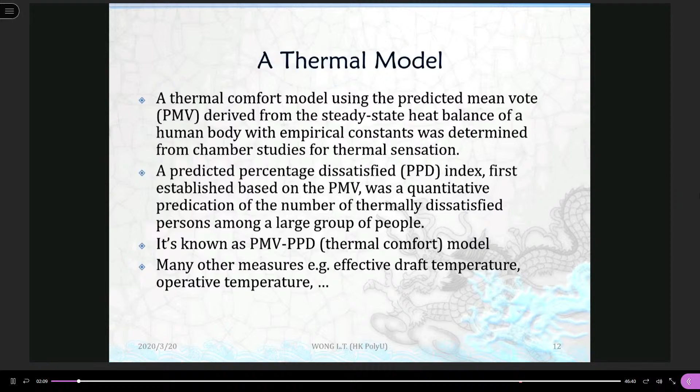Operative temperature, effective draft temperature, a lot. But in this lecture, I only show you the details of this model. The model developed by Professor Fanger looks very complicated, a very long equation, talking about the PMV, the predicted mean vote. The voting for thermal comfort with the result 0 is neutral. So if the calculation is equal to 0, it means a neutral feeling, thermal comfort.

On the minus scale, PMV less than 0 means on the cold side. Higher than 0, on the positive side, means on the hot side. So based on the calculated number, based on the 6 parameters, we can predict overall for a group of people the average, which number will be the final vote. This is the so-called thermal comfort equation.

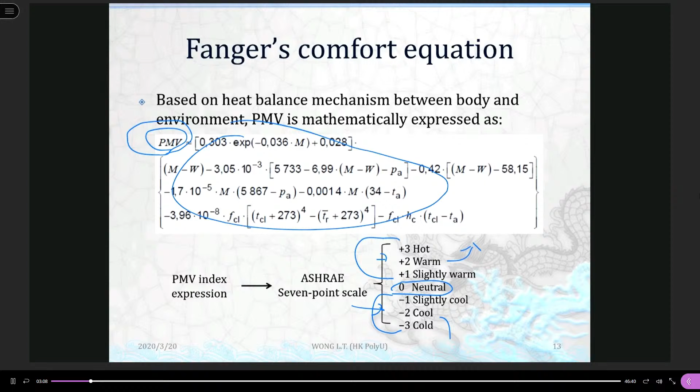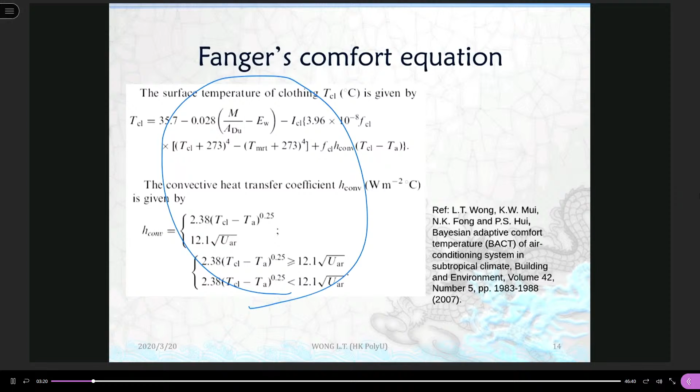The equation here already looks complicated, 4 lines, and each of these parameters is also associated with another few lines of calculation. Therefore, when we apply this equation for hand calculation, it feels complicated. Therefore, we have quite a number of written programs to calculate for us interactively. You can find a lot of programs for that through the internet.

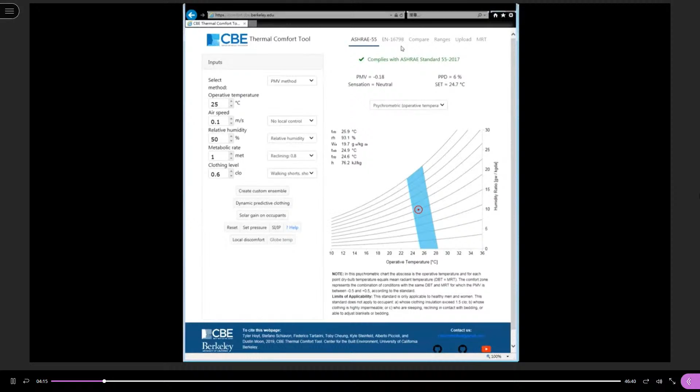I show you here one example available from a research center, UC Berkeley, the so-called CBE Thermal Comfort Tool, which works in an interactive manner as a calculator. You may play around after the lecture; it provides you an interactive tool. You can change the temperature. Move directly. I'll show you again. You can change the temperature.

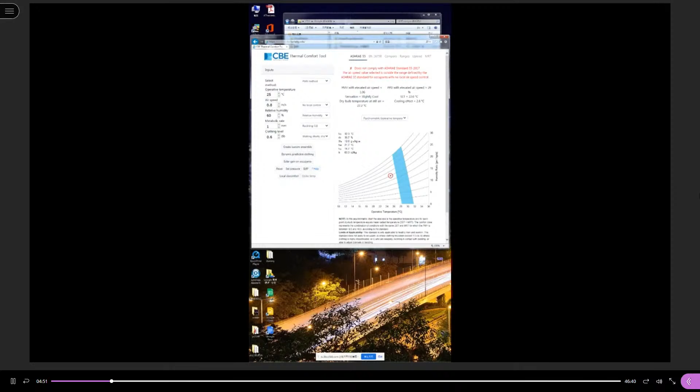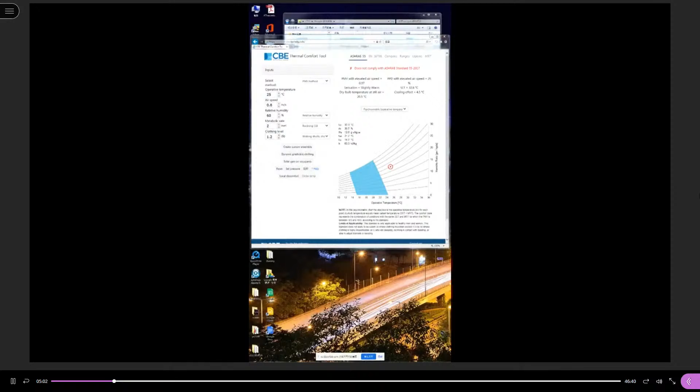Say 25 degrees Celsius, within the thermal comfort zone. The higher the velocity, the thermal comfort zone moves. And different relative humidity, showing this particular point. The condition, different metabolic rates, different clothing values. It's an interactive tool, and we have a lot of this kind of tool available.

The mean votes. The thermal comfort model gives a number, the so-called mean vote, and the mean votes are divided into a 7-point scale. These 7 points are a so-called differential scale, where people can choose the one most representative of his or her thermal sensation at that moment. For the mean votes, the experiments were conducted with people submerged into an environment and asked to respond using

the differential scale and also the dichotomic scale to express directly satisfaction or dissatisfaction. Just two choices, you have to choose one. Together, they can develop the percentage of people corresponding to each vote number and the percentage of the group who feel satisfied. The thermal sensation votes were aggregated to obtain the mean vote for each set of conditions, and the mean vote indicates approximately the average comfort sensation of occupants in terms of percentage.

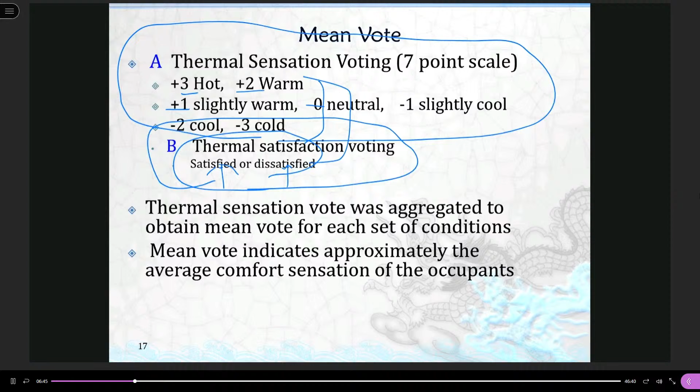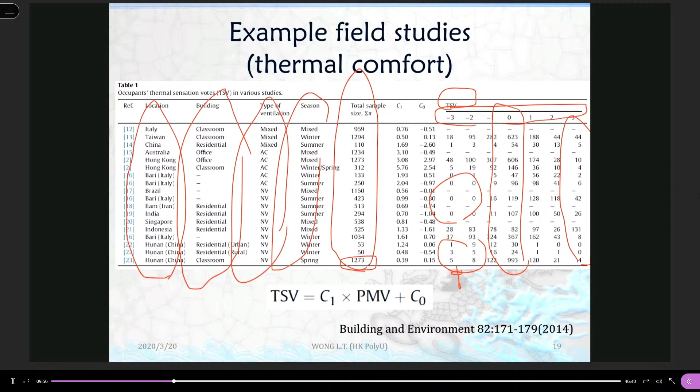All right. The slide shown here is just to draw attention that the thermal comfort model developed in the chamber study may not fully describe the field situation. There will be some fine adjustment. But anyway, at the level 2 study, what we expect from the thermal comfort study is that thermal comfort is a feeling expressed by the human body, a state of mind. And this state of mind can be described by 6 parameters as proposed by Professor Fanger: 4 physical parameters, 2 related to the human body. And these 6 parameters are measurable.

From these 6 parameters, we can calculate the predicted mean vote for the thermal comfort of a group of people. And with this mean vote, we can predict what portion of this group of people may feel dissatisfaction. All right, for the thermal comfort model, not too difficult.

Okay, next, let's see your collective view. Let me build up a multiple choice for you. Let's see how the response was, how well you understand thermal comfort in this lecture. Okay, not too bad, because this is just a theoretical description in the lecture materials. After the tutorial questions, it will be much better. Thank you very much.

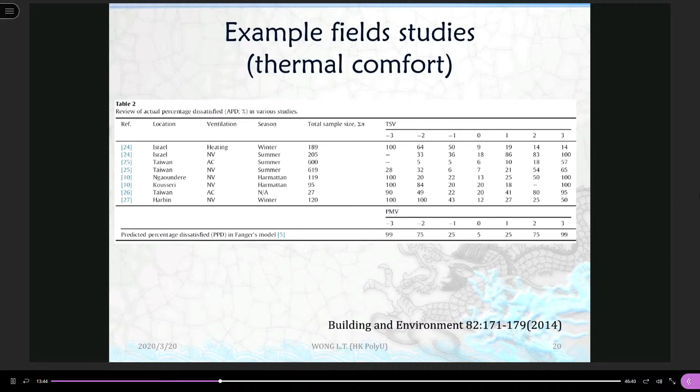Next topic, indoor air quality. Indoor air quality is a term to indicate the air quality within indoor spaces. Especially, we are concerned with the health and comfort of building occupants. However, the term is not clearly defined because we have 2 issues: one is health and the other is comfort. So that is sometimes quite confusing, also to me. Which indoor air quality are we talking about?

Some people are concerned about health, long-term health effects, short-term health effects. Some may talk about the comfortable feeling: the smell is not good, the smell is heavy, something like that. So indoor air quality is actually a vague term that people use daily. The broad disciplines of indoor air quality cover gases and compounds in the air, particles, microbes, contaminants, a lot of different mixtures inside the air. So indoor air quality is actually a very huge topic. We would need at least a few subjects to describe it fully.

In this lecture, we just show you some very simple, basic backgrounds of indoor air quality and control. I think we start from the guidelines for the indoor air quality certification scheme, and this is a baseline control in the legislative manner. This legislation started, I think, 30 years ago already.

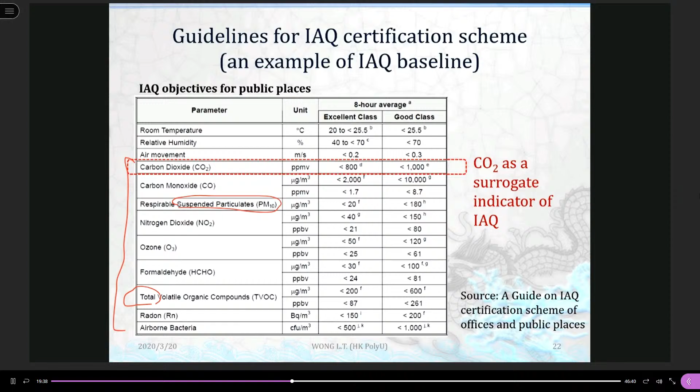Radon, a radioactive gas emitted most likely by granite, which you'll find very high in basements. Airborne bacteria. Also newly introduced, the fungi. Amongst those, we need to put a lot of effort to understand and describe them. Therefore, at the entrance level of study, this level 2 in architecture, buildings and built environment, we will select one of the parameters as a surrogate indicator.

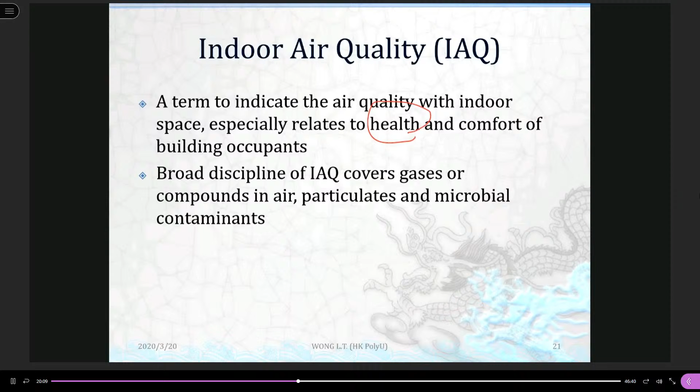For studying indoor air quality, we mentioned that we could assess it by means of health effect or comfort. Here we stick to an approach of a surrogate indicator. Surrogate indicator means CO2 actually will not create a particular physically related health effect or comfort feeling. Actually people are quite insensitive to CO2 levels. However, CO2 levels in the normal indoor environment are a good indicator, because high or low CO2 is representative of some situation.

Say high CO2 means a lot of people emitting smell, doing a lot of activities, associated with, say, high dust level and much VOC emission. So CO2, although not a direct parameter causing health effects or affecting human comfort, is a good indicator that some other related parameter may cause concern for thermal comfort, human comfort and health. So CO2 as a surrogate indicator is proposed here.

Okay, description. Various studies demonstrated that the measurement and analysis of the indoor CO2 concentration could be useful for understanding the acceptability of the indoor air quality in air conditioned and mechanically ventilated spaces. As I mentioned, there are some relationships studied between the indoor CO2 concentration and the indoor air quality. Here I list some examples, say the health effects of elevated CO2 concentration.

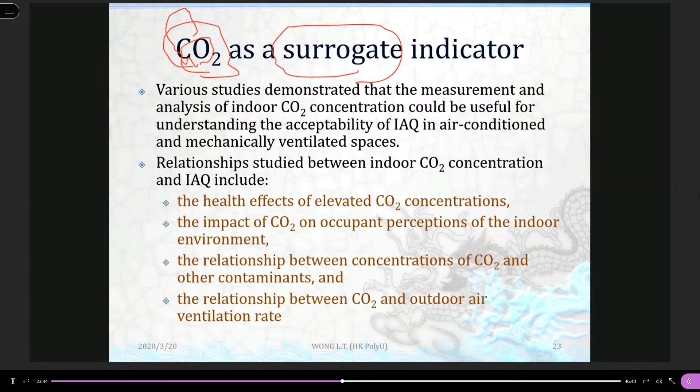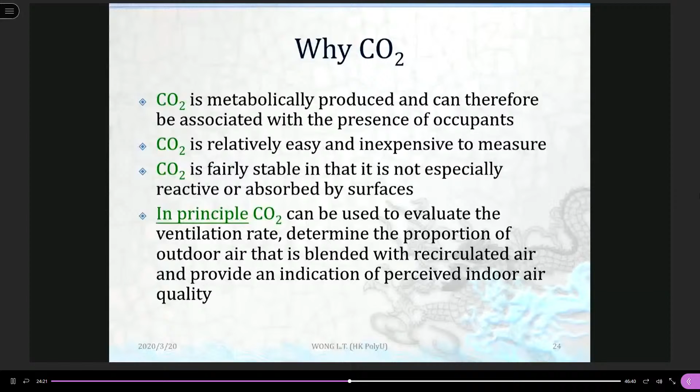The next question is that we do have a lot of parameters. Why is CO2 selected? Because CO2 is metabolically produced by the human body, and it is easy to measure, relatively easy, relatively less expensive. And in the air, CO2 is quite stable and will not react with other substances and surfaces. Therefore, in principle, CO2 can be used to evaluate the ventilation rate closely, to determine the proportion of outdoor air used in order to determine the recirculation air for the air conditioning system.

One of the common indoor IAQ control strategies is dilution. Basically, to control the indoor pollutants we have three different methods. One is dilution. Dilution means we add in clean air so that the pollutant level can be reduced. This is the so-called dilution effect. The common control is by means of dilution, so our calculation will stick to that.

Apart from dilution, we have two other methods. One is emission control. Say we use materials with less emission of formaldehyde, for example, so some materials get a certificate showing the material is safe, emitting less than a certain amount of the pollutants. That's emission control. The other one is removal. We try to remove the pollutants directly from the air, for example, we install a filtration process to reduce the level of particulates. So we stick to the dilution effects in this lecture.

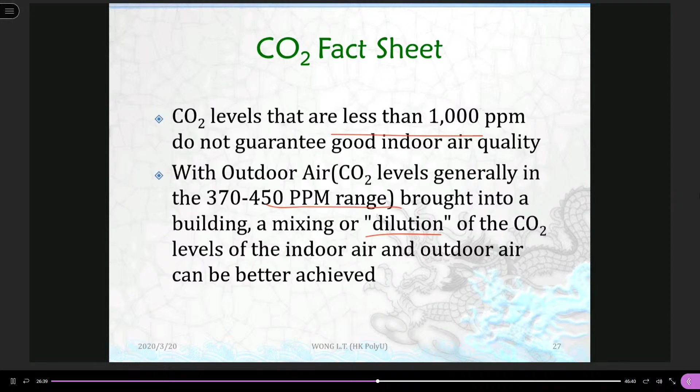And for the CO2 facts, we have mentioned them already. We can apply it closely related to dilution effects. CO2 concentration does not provide a comprehensive indicator, but it's less expensive, so we use it quite frequently as the first level of screening. It also can be indicative of the acceptability of a space by means of body odor. This body odor is calculated from a number of people subject to a certain condition.

In a European country, they developed it for a standard person, with standard height and weight, and bathing level, how many times per day. They put the people inside rooms and then asked people to respond about the body odor. This is the study related to CO2. Under some circumstances, CO2 can also be used to estimate the building air change rate and fresh air at the AHU. I will show you the calculation in the tutorial question.

And there is one study conducted by OSHA. People subject to 8 hours exposure per day to an elevated CO2 level of 5,000 ppm is legally permissible, because they found no significant health effects at 5,000 ppm, so we know the tolerable limit is quite high.

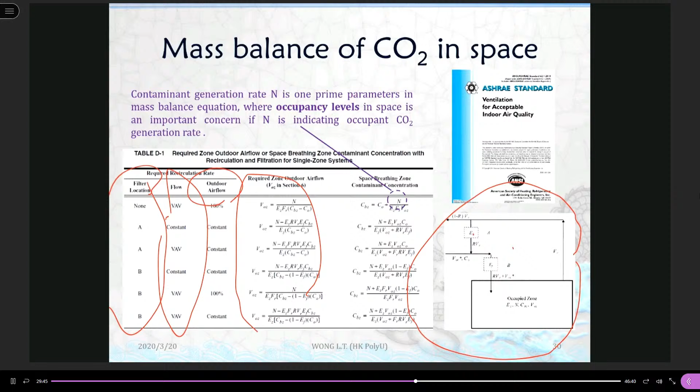Okay, this one is more interesting, because CO2 is closely related to human inhalation. Each occupant will emit a certain amount of CO2. Based on this fact, we can calculate quite accurately the expected CO2 level in a well-mixed space from the outdoor air ventilation rate, because the background CO2 of outdoor air is quite stable, approximately 350 to 400.

Based on the numbers shown there, the ventilation rate for rooms and the number of people, per person, if we provide this ventilation rate in the long run, in a steady state, well-mixed environment, the expected indoor CO2 level will be 500, just by mass balance. If we reduce the ventilation rate to 10 liters per second per person on average, it will be around 800 ppm in the long run, steady state, so we can calculate quite accurately that way.

There is also other information in this table about dissatisfaction, also from Fanger's study, this time not thermal comfort but indoor air quality acceptance, corresponding to the CO2 levels. A certain number of people under the test condition will express dissatisfaction about body odour, so here is the percentage of dissatisfaction under the test CO2 levels, complaining about body odour. Yes, we do have this kind of study.

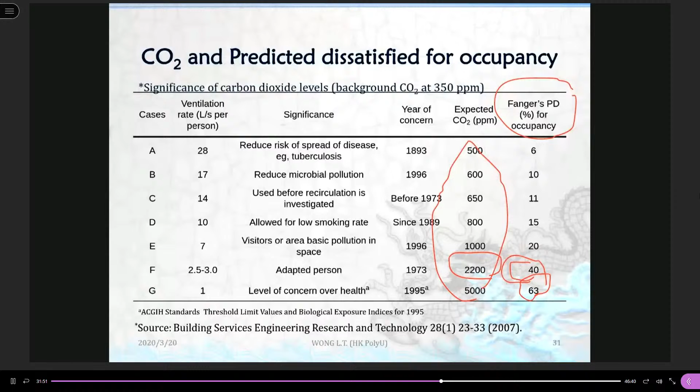High CO2 concentration in humans. The main function of the lungs and chest is getting oxygen from the inhaled air into the bloodstream, and at the same time eliminating carbon dioxide from the body through the air breathed out. So for very high CO2 concentrations, we're talking about 30-something percent, respiratory failure will occur.

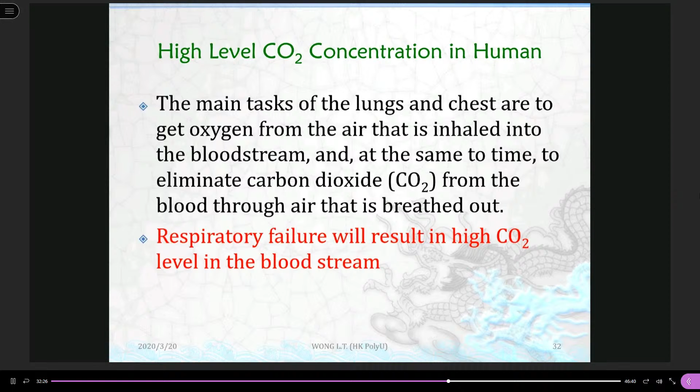The measurement of the CO2 level in the bloodstream is not so accurate, so I do not present some expressions. The definition of respiratory failure, I list here. You can just read it as additional information.

CO2 from other perspectives, apart from the described ventilation and satisfaction aspects. CO2 is metabolically produced and therefore can be associated with the presence of occupants. Say I install a CO2 sensor here, I can know how many people are there, if we know the ventilation rate.

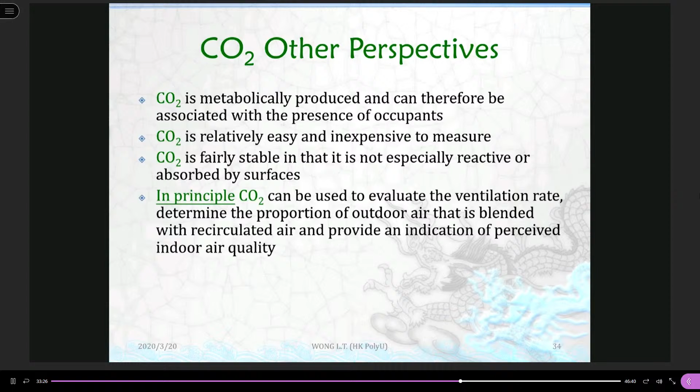CO2 is relatively easy and inexpensive to measure, very stable, as we mentioned, just repeating that. Indoor concentration depends on the outdoor level and the production rate of CO2 within a space, so we can make use of it in ventilation calculations. In offices, with sedentary activities, the production is primarily from metabolism, so we can make predictions relatively accurately.

In some cases not dominated by metabolism, the use of CO2 may be less significant. Here is an example: an open gas cooker. Apart from the CO2, it will produce CO. It makes a further significant contribution of CO2, along with CO, particulates, and VOCs as well.

To determine the contribution of CO2 generated in the space, the difference between the indoor concentration and outdoor concentration has to be measured, these two levels.

So that we have only the one equation, the IAQ procedure, to calculate for the CO2. Suppose a contaminant is emitted or released within the ventilated space by the human body. The emission of contaminants starts at time 0. We put the human body inside there, and then we monitor the CO2 level.

The contaminant concentration in the outdoor air is C_ao. So we list all the variables: the constant removal rate, which remains unchanged, then indoor concentration, outdoor concentration, indoor concentration at time 0, and the indoor concentration at different times, because we put somebody inside. Then the room volume, and also the constant rate of production of contaminant, which is the breathing rate. We can make use of the parameters to calculate the behavior.

For the concentration, we come up with a unit of ppm. ppm here is in the sense of volume, so in some textbooks they will specify ppmv, meaning parts per million by volume. This will be different because it's subject to the mass. Some will be determined by weight, ppm by mass or by weight. Parts per million is a unit of fractional concentration.

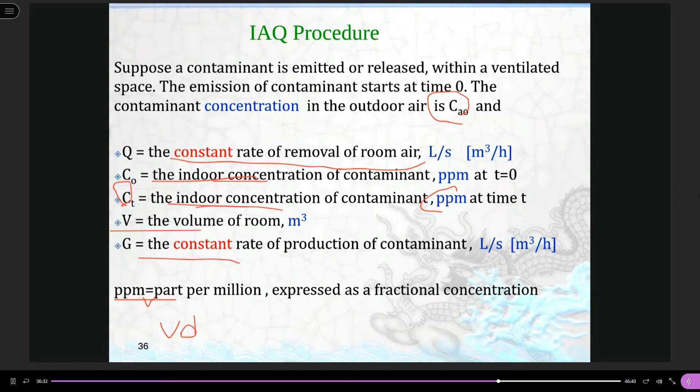And the equation, we jump a few slides and then go back. The equation here relates to this. At time 0, there's the initial concentration, and then we put the source inside the room, and over time the CO2 will increase accordingly, following the curve described by the equation. After some time it becomes steady, which is steady state. Because time equals infinity, the whole equation can be simplified into the steady state equation, which is simpler.

Look at the parameters. Here is an example measured by ASHRAE, from the journal. Here's the source, talking about the CO2 production of a human body based on metabolic activities. As we mentioned, we measure the amount of CO2 by the oxygen consumption method, by the breathing air. It's related to the metabolism process inside the body. The relationship is quite linear, easy to predict. Physical activity is in METs. 1 MET is approximately seated quietly, and the CO2 production rate is 0.25 liter per minute.

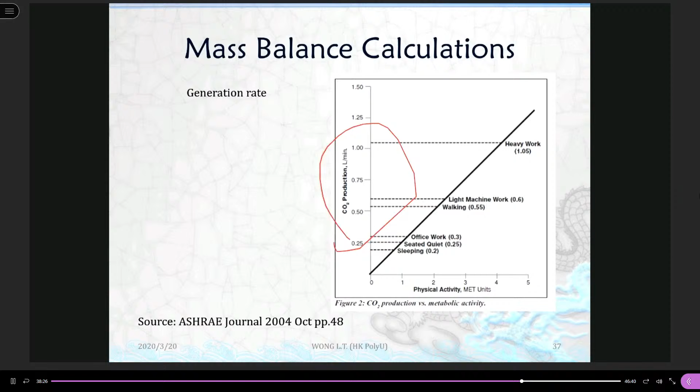Higher metabolism results in higher CO2 production per human, so we can calculate quite accurately. The contaminant is released by the human body, so G can be determined. The outdoor concentration is quite steady. Indoor concentration is the baseline monitoring level. For the time period, steady state exposure is for a very long time, say 8 hours. For the unsteady state, we're talking about a few minutes, 10 minutes or 30 minutes, something like that. Then we have the ventilation rate for the balance.

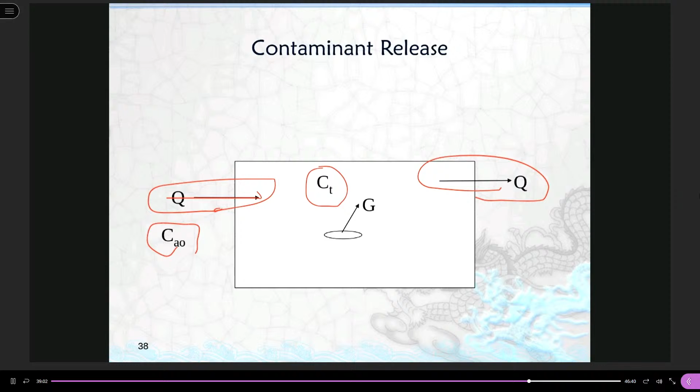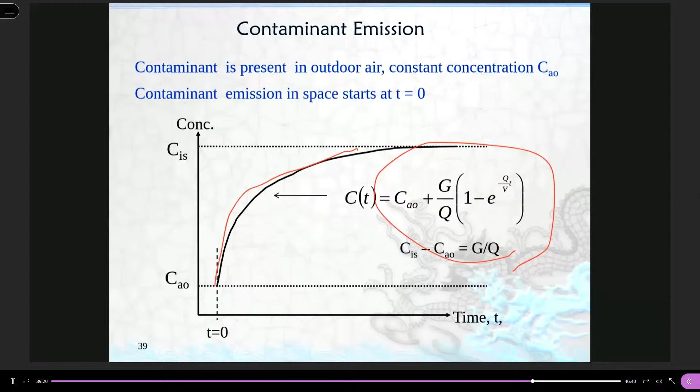For a balanced room, we take the ventilation rate coming into the room and then mixed. The next slide talks about the process, the concentration history, which can be expressed mathematically. Look at the equation for the steady state. The steady state can be expressed in two forms.

We can rewrite the steady state expressions of contaminant concentration as follows, which helps us calculate the ventilation rate. Based on the amount of emission, how many people are there, the dictated activities, the target exposure concentration level, and the outdoor CO2 levels, we can calculate the corresponding ventilation rate for design. This procedure is the so-called IAQ procedure.

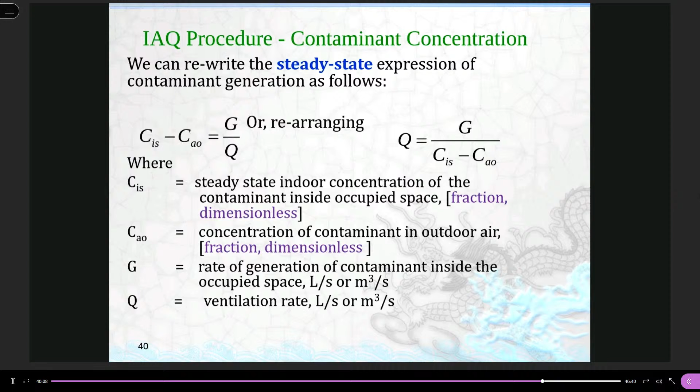Here is a simple illustrative example. It serves to help us get familiar with the equation. The example is a living room of 5 meters by 6 meters by 2.9 meters with 4 people. The airflow rate was 19 liters per second. Based on that, we try to do some calculation.

If there are no airborne contaminants of health concern, comment on the indoor air quality if each occupant produces 5 cm³ per second. Simply put the numbers in. CO2 generation by one person is 0.005 liter per second, which is 5 cm³ per second. I think the most confusing step is the units, transforming the units.

Okay, cm cube, dm cube, liter per second, liter per minute. Okay, air change rate, which confused me a lot at the beginning. So in there, I think we may spend some time. You are advised to spend some time to get familiar with those units. Okay, for all occupants, 4 occupants, therefore 4 multiplied by 0.005 comes up with 0.02 liter per second.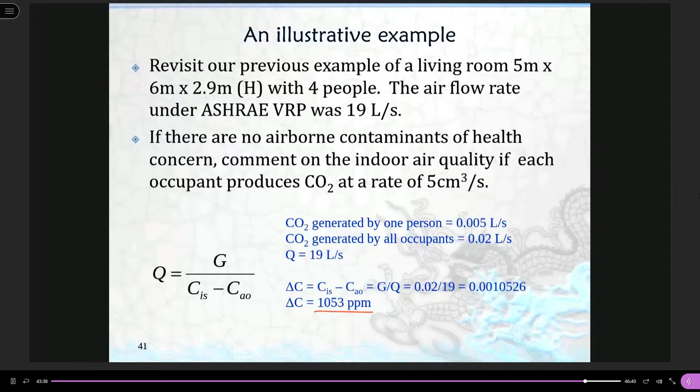The indoor air quality would not be acceptable under this criteria. Okay, for a very high criteria. Here, 1,000 more, therefore 1,400, approximately. Note that the ASHRAE VRP is to provide sufficient outdoor air for adapted persons, whereas 800 ppm, 700 ppm is the baseline monitoring control level.

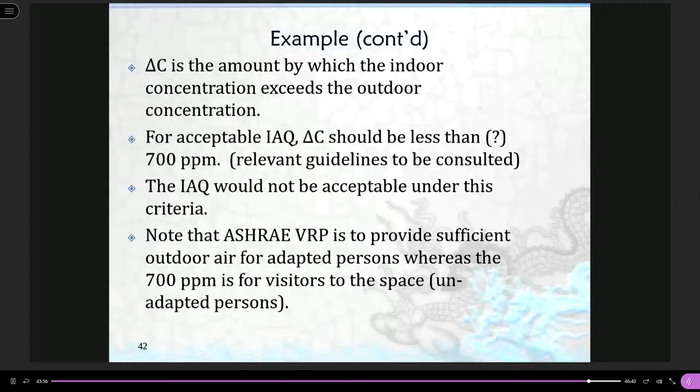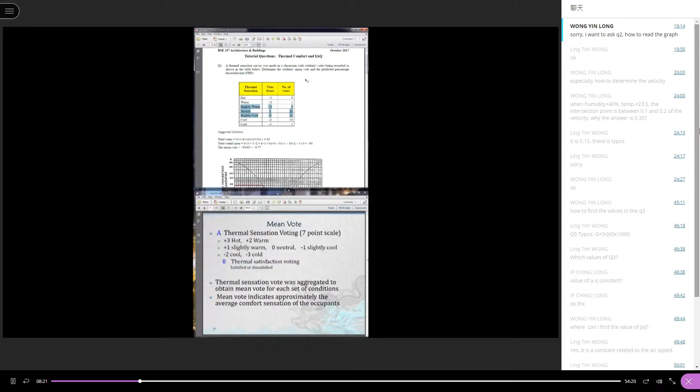Okay, and even under these acceptable thermal comfort conditions, some may still make a complaint about thermal discomfort, not being comfortable. All right. Therefore, the second part, we are going to determine the predicted percentage of dissatisfied using Fanger's model. In this example, we make use of the graphical method.

We do have a graph, something like that. Instead, we also can make use of the equation. Just directly substitute minus 0.77 as the PMV into the equation, and we'll come up with the number, which is the percentage of the PPD calculated. It should be the same.

And in this suggested solution, we just plot the minus 0.77 onto the x-axis and find the corresponding dissatisfaction is around 20%, 18%. Right? Okay, for this question, simple.

Okay, seems straightforward, but mostly no response. Okay, not sure they are here.

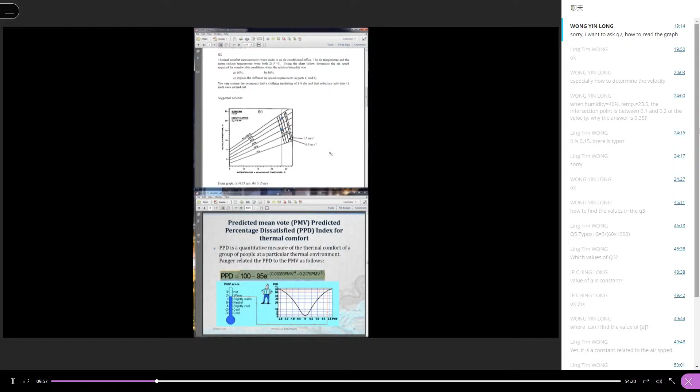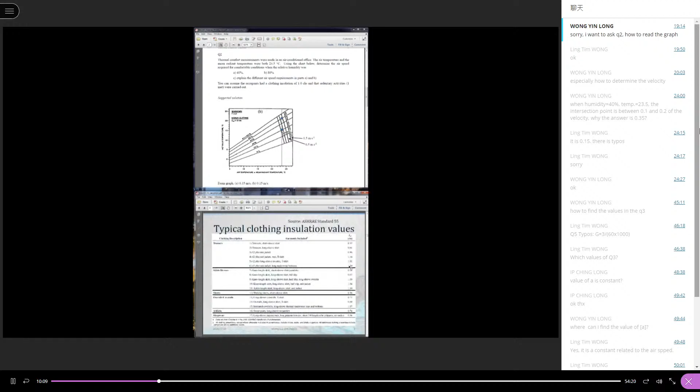Okay, now the second question. The second question is also related to the thermal comfort zones. Okay, we just recall the graphs over there. Here we have some examples of thermal comfort charts. Just four examples. We pick one of them for this example.

In this example, the thermal comfort measurements were made in an air-conditioned office. Usually, this kind of measurement will be made when the FMO, Facility Management Office, receives some thermal comfort complaint. They will send some people to reassess the thermal comfort condition for the place or the office, and then adjust the set point of the air conditioners to fine-tune the condition, and see whether they can solve the problem or not.

Sometimes the complaint is made due to some other reasons. Actually, not much changes, and then they finally settle the complaint, something like that. Because thermal comfort, once again, is not only about the physical determinants, but also the state of mind, the sensation of the feeling, right?

Okay, now the question is that thermal comfort measurements were made in an air-conditioned office. The air temperature and the mean radiant temperature are the same, both 23.5 degrees Celsius. Provided with the chart below, we are required to determine the air speed required for comfortable conditions when the relative humidity is 40% and 80% respectively.

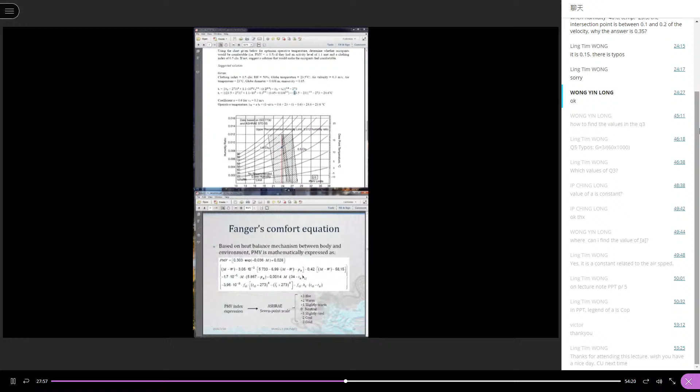So for that, we put the operative temperature onto the graph, which is calculated by the equation here, which is the operative temperature, the weighted sum between the air temperature and the radiant temperature. For the velocity of 0.3, the coefficient should be 0.6. So we put in the 0.6 over there, weighting the air temperature and the mean radiant temperature.

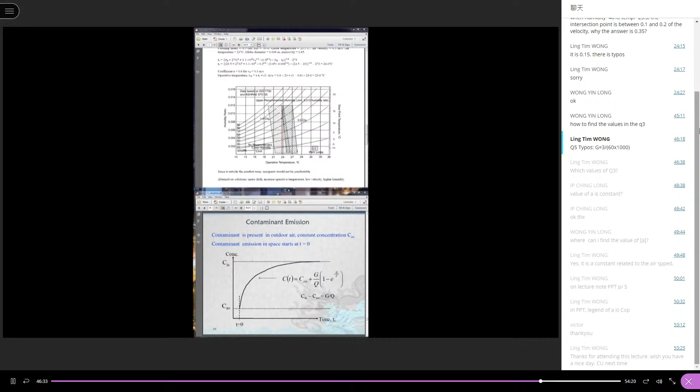Okay, we have one question: how to find the values in question 3. Which values? The values. For question 3, okay, we have to determine a number of values. For the mean radiant temperature, we make use of the equation. For the operative temperature, we make use of another equation.

For the thermal comfort zones, we make use of the graphs by plotting the operative temperature calculated and the given relative humidity to fix a point. And then see if the point falls within the envelopes of the thermal comfort zones, defined by the clothing values. If not, we try to see how to move the point correspondingly by the parameters so that the point finally falls within the envelopes of the thermal comfort zone. Say, for an increment in operative temperature, we can adjust by the equation to have a higher air temperature or higher radiant temperature or both.

Okay, so we are not going to find the values, but to understand the mechanisms of thermal comfort as presented with the equations here. All right. I hope this is informative for you. Any further questions? Just review the content, and ask if you have any questions.

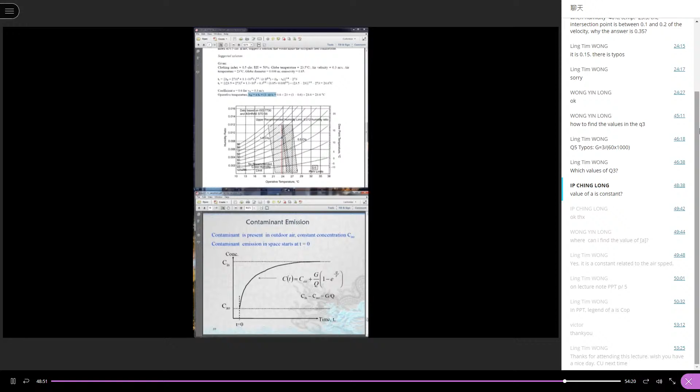Is the value of A a constant? Yes, the value of A is a constant. In the lecture notes, the constant uses a different legend. Here it's using a constant COP, which is the constant A. And this constant is related to the air speed. For air speed between 0.2 and 0.6, the constant will be 0.6. For low air speed, the constant will be 0.5. For air speed higher than 0.6, the constant will be 0.7.

So yes, this is a constant related to the air speed. And you can find the constant in the lecture notes, on PowerPoint page 5, as shown there; I have highlighted it on the screen here. The legend is different. COP actually is the value of A.